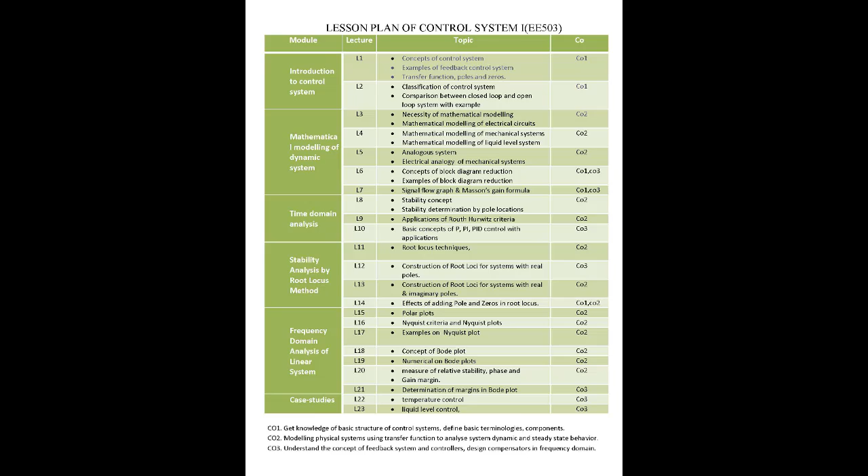This is our second video lecture on the Bode plot. In this video, we will discuss some numerical problems of the Bode plot. This video contains the introduction, the scale of the Bode plot, and some examples.

Now, the main attraction of the Bode plot is that it can be produced and modified by using pencil and paper methods. The open loop transfer function represented in factored form is approximated by a number of asymptotic straight lines, one for each factor, which may be added graphically to produce plots accurate enough for most design studies. The Bode plot is used to determine the gain margin and the phase margin for analyzing the stability of the closed loop system.

Now, some computer programs are also available to produce the accurate Bode plot of the open loop transfer function, so design problems have become much easier today. In this video, the traditional method of producing the Bode plot based on the asymptotic approximation to the various elements within the loop, and then cascading them all for the overall open loop transfer function, has been described.

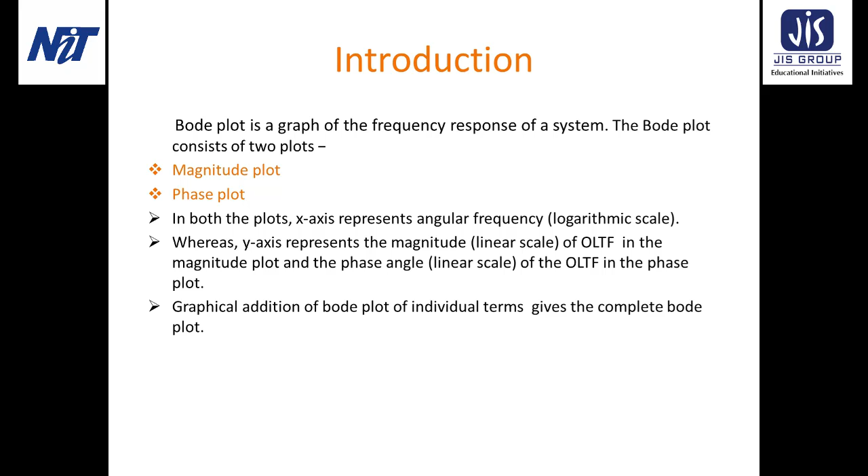If we add the different parts of the individual terms, it will give the complete Bode plot. After getting the Bode plot, we can find the stability of the system using the phase margin and gain margin concept. That part we will discuss in the next video. In this video, we will only discuss how to draw the Bode plot.

Before starting, we have to keep in mind two things. The magnitude of the open loop transfer function will be expressed in decibels, using the formula: magnitude in dB is 20 log |G(jω)H(jω)|. The phase angle of the open loop transfer function will be expressed in degrees, and the base of the logarithm will be 10. The Bode plot is plotted against logarithmic frequency, and every frequency division represents a power of 10 times the previous value, that is, a decade.

For the Bode plot, the phase shift is measured in degrees, but radians can also be used, and for the magnitude plot we convert it into dB by multiplying 20 by the log of the value. So, these are the scales on the Bode plot.

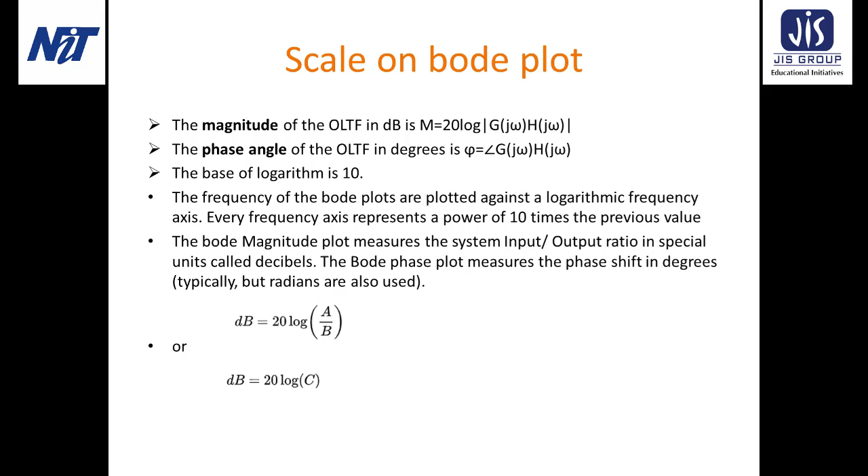So let us take an example. Here we will draw the Bode plot of the given open loop transfer function 200(s + 10) / s(s + 5)(s + 20). First, we will convert this pole-zero form into time constant form, because to find the corner frequencies we use the relation ω = 1/τ, so it will be simpler in time constant form.

So first, we convert the pole-zero form into the time constant form. For the conversion, we take 10, 5 and 20 common. So it gives 20(1 + 0.1s) / s(1 + 0.2s)(1 + 0.05s). So there is a pole at the origin.

Next, we convert it to the sinusoidal transfer function, that means we put s = jω. In this relation, I have put s = jω and found this relation. Next, we have to find the starting point, that means the point from where the graph will start.

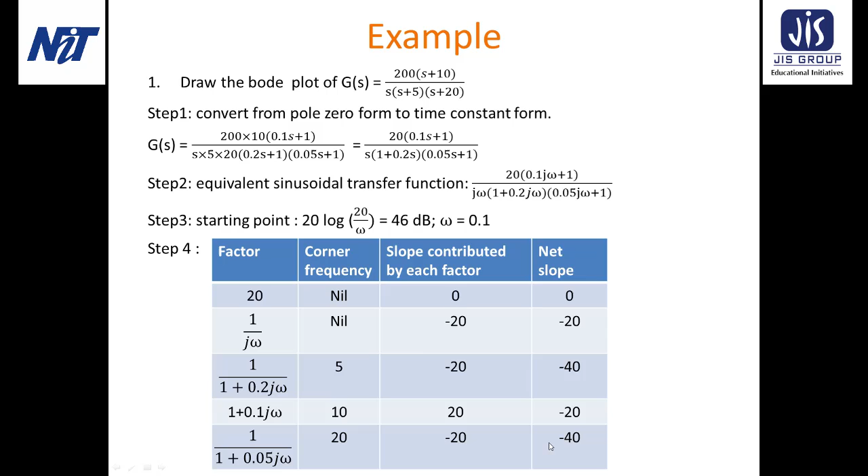So there are 3 corner frequencies, and at each corner frequency the slope has changed. This one is minus 20, then minus 40, again minus 20, then minus 40 dB. After this minus 40 dB there are no more corner frequencies, so this minus 40 will continue up to infinity. That's why at the last point I have drawn the minus 40 dB per decade going to infinity. So this is the magnitude plot, and from it we can see that the magnitude plot cuts the reference 0 dB line at 20. So the gain crossover frequency is 20 radian per second.

Next is the phase plot, and the phase plot is very simple. This represents the omega values, so for each omega value we will put the degree values. For 0.1, the value is minus 89 point something. Then at 0.4, from this graph, it is minus 93.42. In the phase plot I have chosen each small box equal to 2 units, so 5 boxes are 10 units, and you can vary this as per your choice.

In this way I have plotted all the points, and this is the phase plot of the open loop transfer function. Now we can see when omega is infinite, the angle value is minus 180 degrees. That's why in this graph it does not cut the reference line. The last line is the reference line, and this phase plot does not cut it, so there is no phase crossover frequency. That means the phase crossover frequency will occur at infinity, because at infinity the value is minus 180, so before that it will not cut the minus 180 degree line. So this is the conventional way to draw the Bode plot.

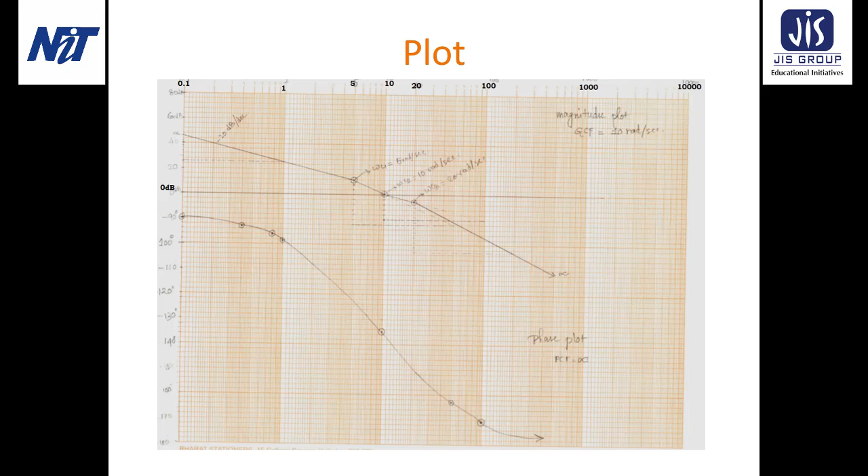Let us take another example. Here in the same way, first I have converted it into a sinusoidal transfer function by putting s equal to j omega. I have not considered the first step because it is already in the time constant form. And in the same way, the value depends on 1000 divided by omega, that is the pole at the origin and the constant term. At omega equal to 0.1 it becomes 80 dB, so the graph will start from 80 dB.

Here there are 4 factors. For 1000, the corner frequency is 0, and the slope contributed by 1000 is 0, so the net slope is 0. Then we write the 1 by j omega term. Its corner frequency is 0, and the slope contributed is minus 20 dB per decade, because it is in the denominator. The net slope is the sum of the current and previous slope, giving minus 20. Next, we find the two more corner frequencies, 1 by 0.2 and 1 by 0.1. 1 by 0.2 gives 5, which is less, so it comes first.

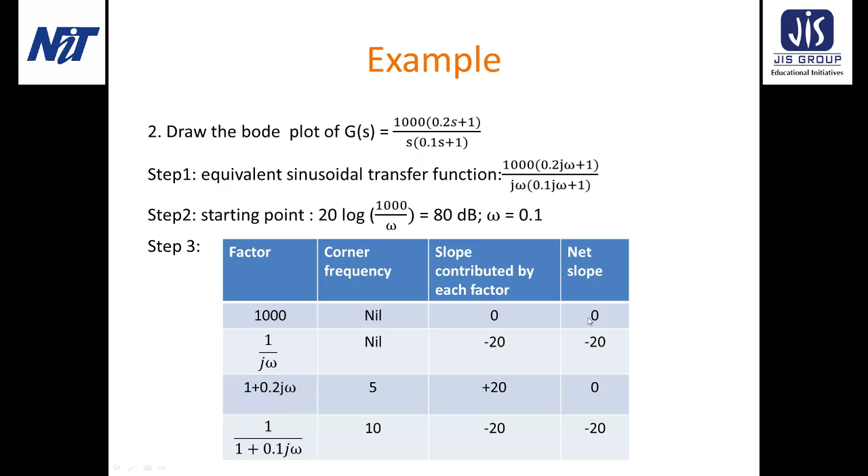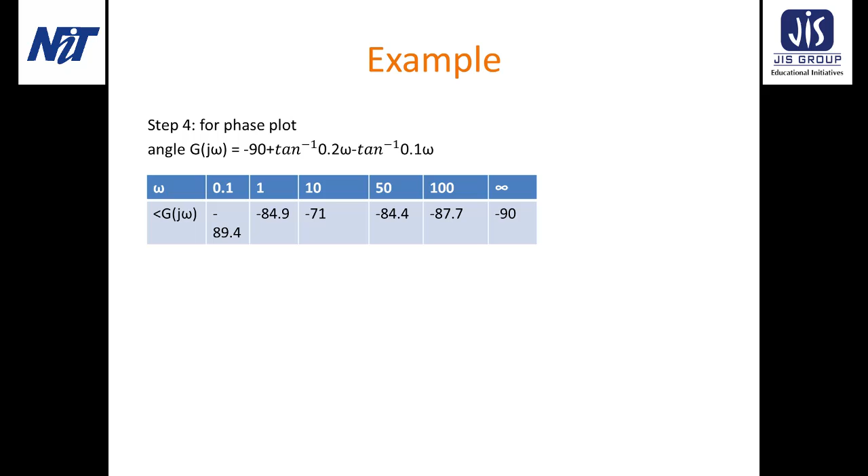And in the same way, at each value of omega, I have plotted the degree values and then got the phase plot curve like this. And it has not cut the reference minus 180 degree line. That's why there is no PCF over here. Here also PCF is equal to infinite. So in this way, we can easily draw the bode plot of each factor, and then cascading them all, we can find out the overall open loop transfer function bode plot.

And in the next video, we will find out the gain crossover frequency, phase crossover frequency, and the phase margin and the gain margin to find out the stability of the system. Now the phase margin and gain margin are nothing but the terms in which we express the relative stability. The phase margin and the gain margin have both been discussed using the polar plot. You can easily find out the phase margin and gain margin using the bode plot also.